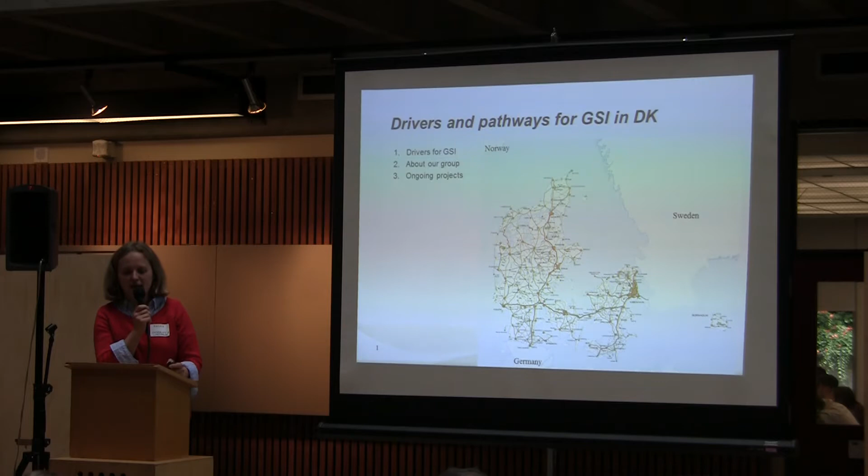So, the main drivers for change in stormwater management in the Danish cities. I think first of all it is climate change adaptation. That is on top of everybody's mind - how to avoid these uncontrolled floodings that we have seen for the last 5, 6, 7 years.

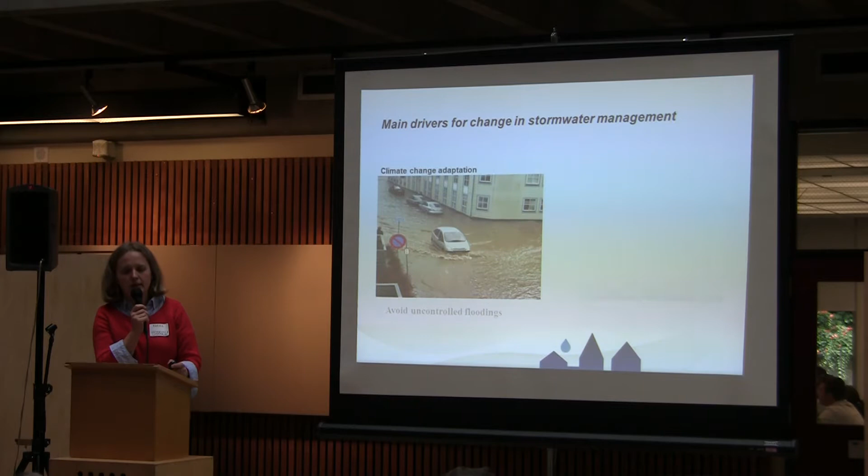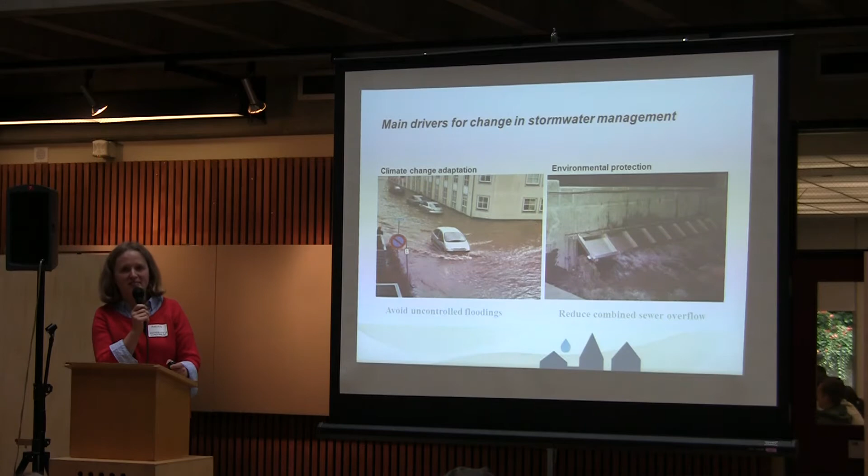Another quite important driver is environmental protection and how to reduce the combined sewer overflows. Some additional drivers...

It's about increasing the livability of the cities - using stormwater as a positive for aesthetical reasons, for social integration, increased biodiversity, mitigating urban heat island. These things are on the agenda to a more or less extended degree across the country.

Our group, I think we're like 33, 34 people joining this tour. We are all part of a strategic partnership that we have named Water in Urban Areas. We are supported by the Danish Council for Technology and Innovation, and we started 2 years ago, and we will finish by the end of 2014.

We have been given a grant of approximately 4.2 million US dollars. And today we are like 150 partners, institutions across the nation. And I guess that the 33 people joining this tour represent like 25 of these partners.

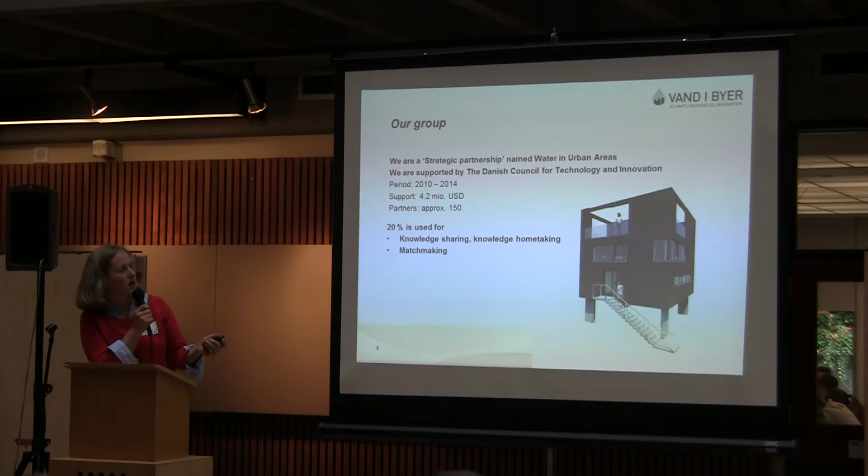So we are trying to create a joint place where we have two main purposes. We use 20% of this grant for knowledge sharing, knowledge home-taking, like this tour. Last year we had a tour around Scandinavia, next year we will go around Europe to take home new knowledge, and then we also use a lot of time on matchmaking and identifying problems and good ideas.

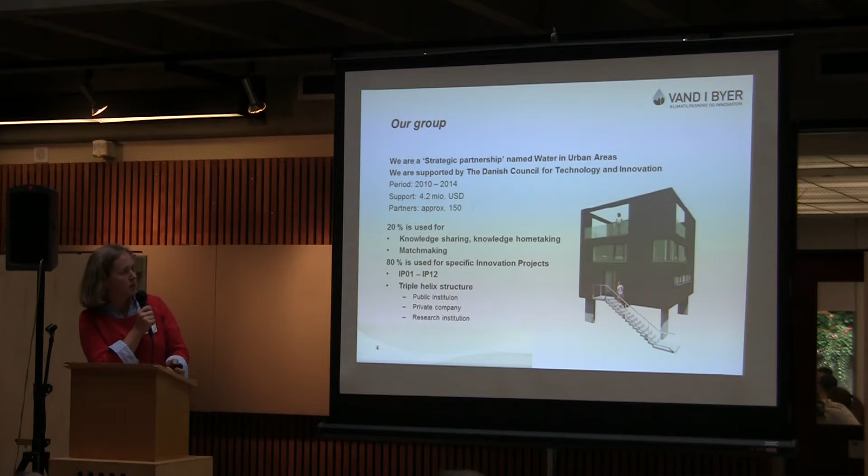The major part of our grant is used for specific innovation projects, and so far we have initiated 12 of these innovation projects, and I will give you an introduction to some of them.

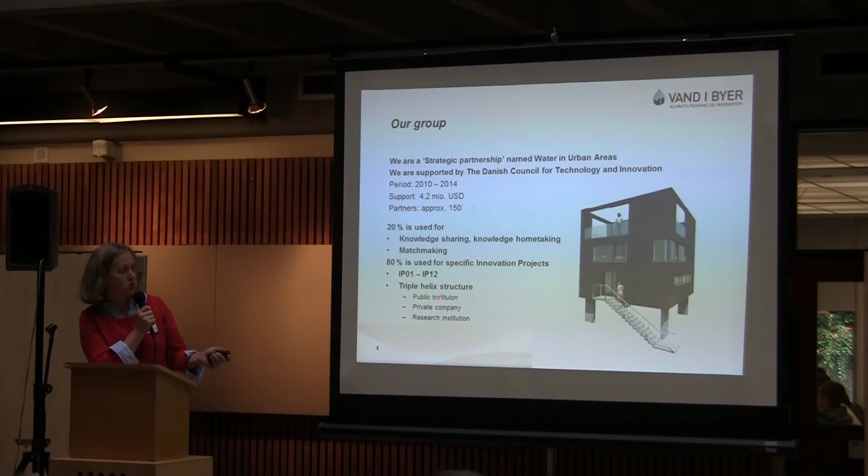The requirement for using money on these innovation projects is that it has a triple helix structure, and it means that in each project we should have at least one public institution representing the end users, one private company, and one research institution, and preferably more.

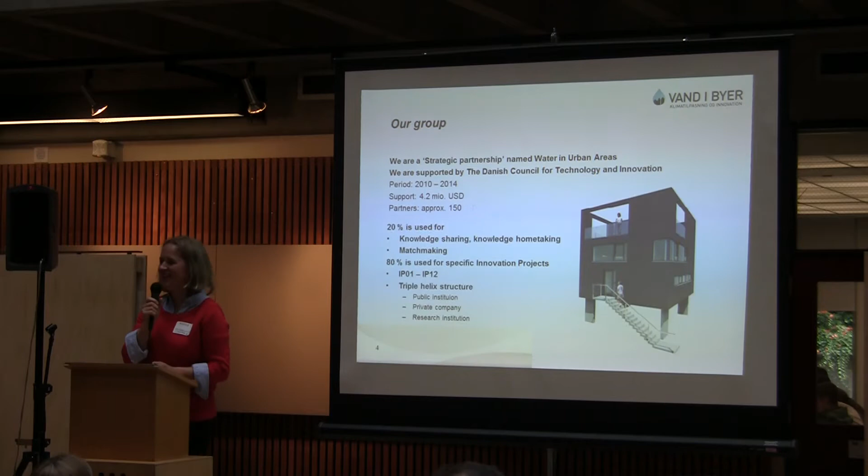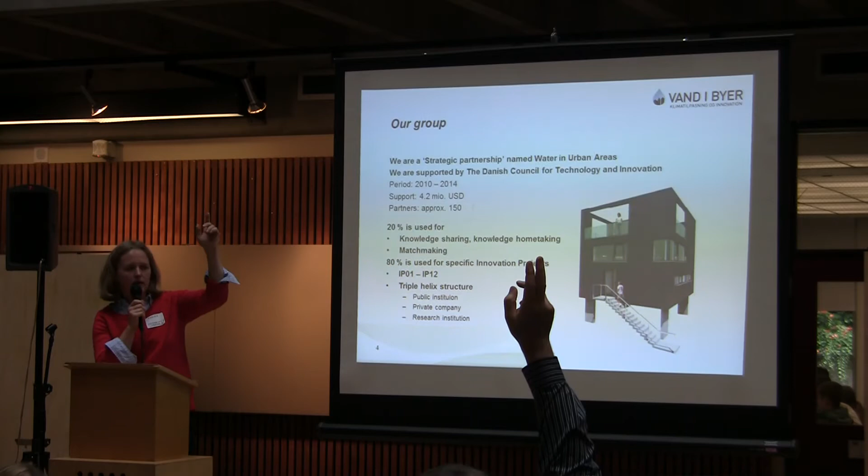So maybe I could ask the Danish participants to raise your hands if you are a public institution, including - yeah, so these are you are a research institution, sorry. And how many do we have from the private companies? And from the research institutions, including DHI, I think? Yes? And I think that is quite representative for our partnership.

What do we aim to achieve? The overall goal is to contribute to the transformation of cities from climate-sensitive units with high greenhouse gas emissions to climate resilient cities with low greenhouse gas emissions and continued growth and welfare. So the idea of Water in Urban Areas is to facilitate such processes. And the idea behind it is that we will come through with a transformation of the Danish cities, and as an extra benefit, maybe we will come up with some good solutions that can be exported and help pay back the investment in the transformation of the cities.

One of the key questions is this one: grey or green solutions? Should we go for larger pipes, sewer-based climate change adaptation, or can we come through with some disconnections, landscape-based adaptations?

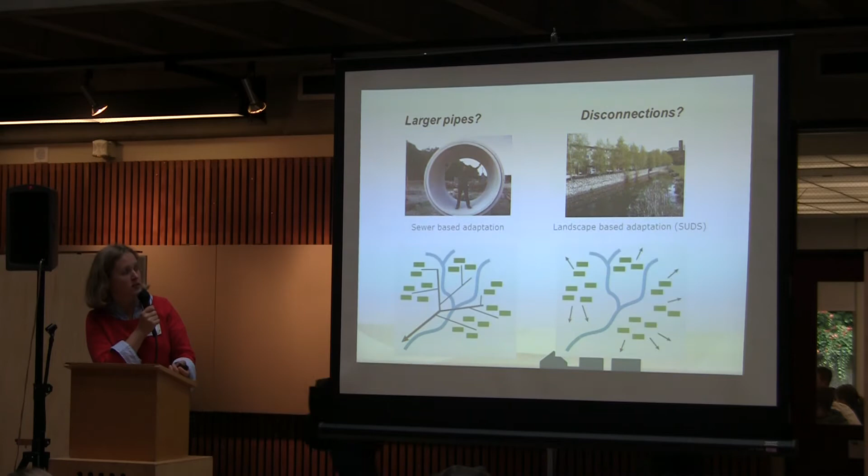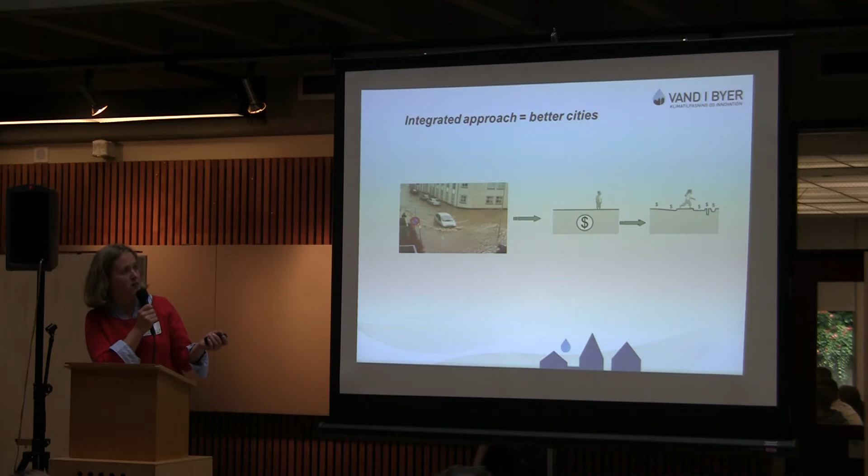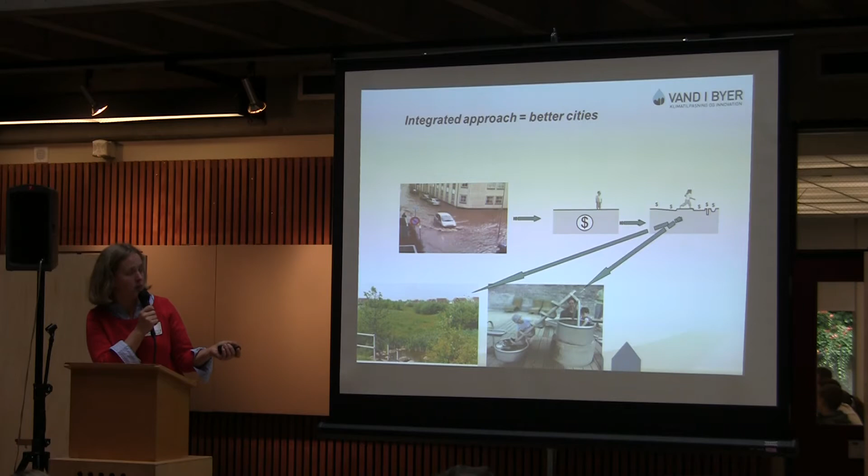I think there's a joint understanding that by having an integrated approach where we lift the investments in climate change adaptation from below ground to above ground, there may be a lot of benefits, such as enhancing biodiversity, creating new meeting places, and supporting mobility in the city. But the key question is really, is this worth the investment, or is it too costly?

We have a three-way approach to sizing this potential. First of all, that's a question of quantity: is it at all possible to find room in the city for all this water?

How about the quality? In Denmark, we rely heavily on groundwater for drinking water supply, so we are not interested in polluting that water if we increase infiltration of perhaps contaminated water. And the last thing is, can we really make this added value come through? Can we increase the life quality? There are a lot of issues and disciplines that have to work together to assess these things, and that is really the background for this partnership.

Now I will go through these innovation projects, which will be a quite rapid flyover of what is going on. I hope we will have time to discuss it further if you have specific questions.

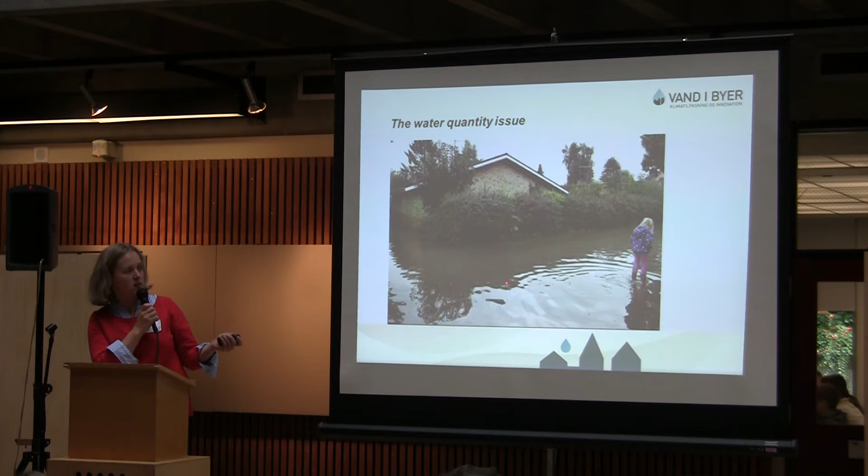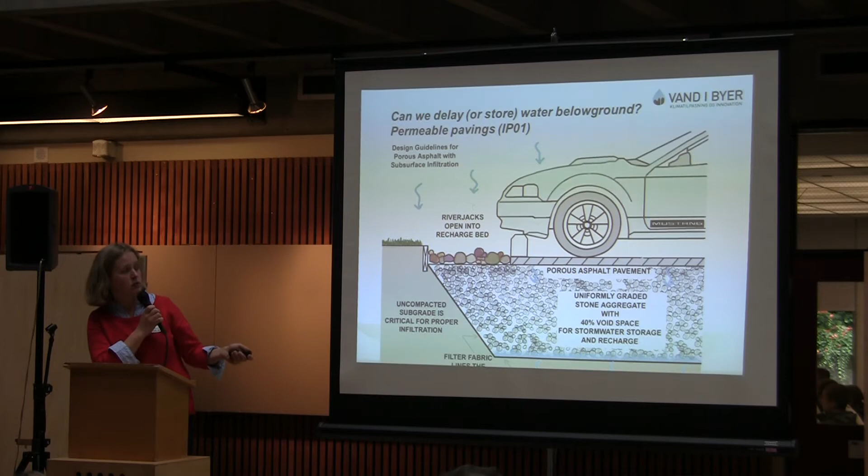Regarding the quantity issue, can we find room in the city? To avoid making bigger pipes, can we use green infrastructure instead? We are looking into permeable pavings that have a huge storage capacity below ground, so we can really create a delay in the city. We are testing a new carrying layer based on gravel.

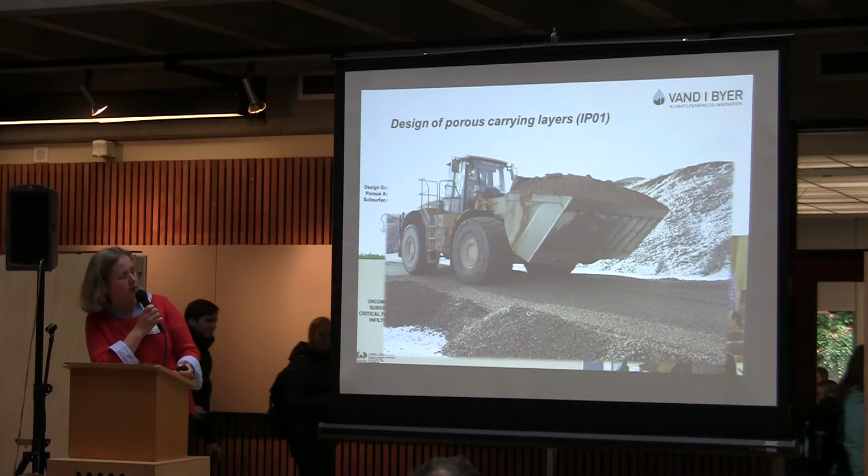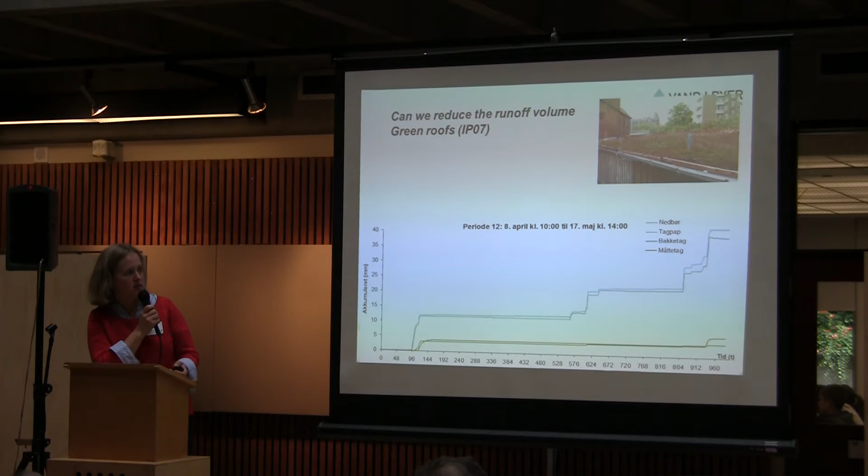In another project, we are looking into the opportunity of increasing the infiltration rate. If we understand the soil better - we have morainic till soils in Denmark with huge variability in morphology - and if we can map that morphology, we may be able to place our infiltration devices more strategically, using the more permeable layers for rapid infiltration.

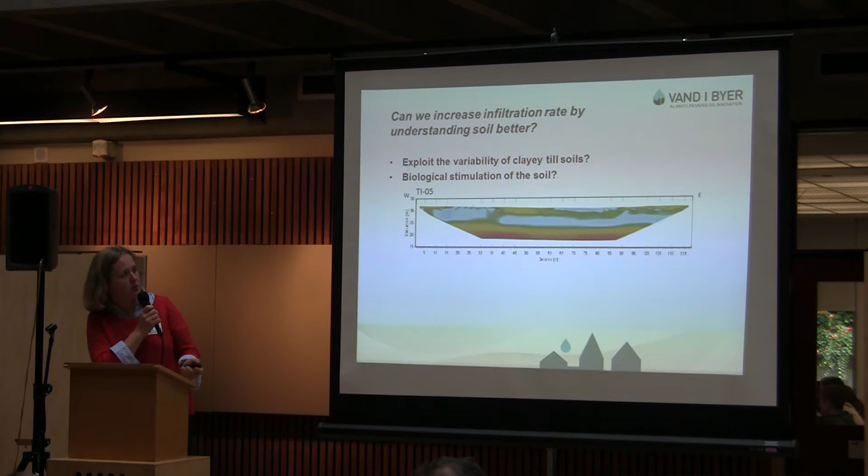We also make experiments with biological stimulation of the soil. Can we increase the earthworm population in urban areas to increase the infiltration rate?

Regarding the water quality issue, we are very concerned about that. We have focused on all these groups of contaminants and are looking into opportunities for cleaning the runoff water before discharging or infiltrating it.

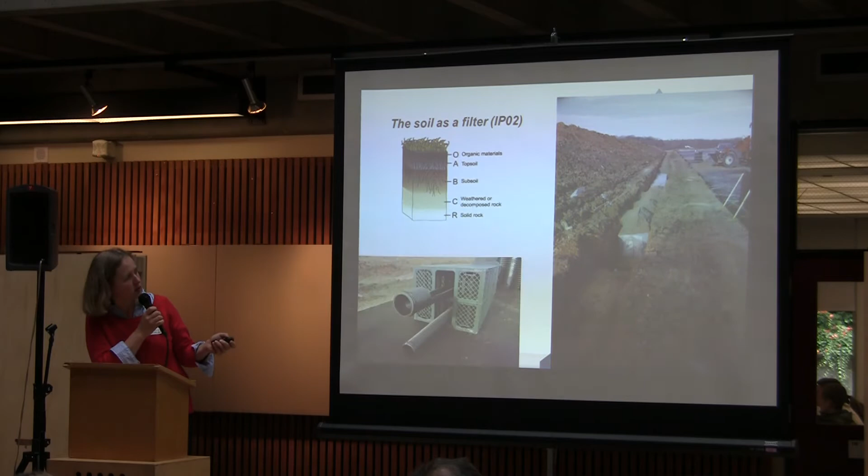We try to document if we can use the soil as a filter, doing engineered soils as we do here. We have a test facility right next to a parking area where we made an infiltration trench, and on top of that we put the filter soil, the engineered soil. We have equipment for taking out samples to see if it meets requirements.

We also test a technology we call dual porosity filtration, specifically developed for treatment of road runoff. We have a pilot plant in Copenhagen, and this is the quality of the road runoff as it enters the facility - it's a horizontal flowing treatment facility, and for every meter it becomes cleaner.

Now we're going to test if some industrially produced panels can do the job in a real setting. We have 3 selected roads in a suburb of Copenhagen where we would like to disconnect these roads, take the road runoff into a park, use an existing ditch for water storage, and then treat the stormwater in a dual porosity facility before discharging to a stream.

Okay, the integrated approach - I have selected these projects. Can we increase biodiversity and improve habitat quality in our cities by linking stormwater management to this?

We have an example in a municipality north of Copenhagen called Allerød, where they're going to build some retention basins. The idea is to link the design of these basins with the municipality's biodiversity strategy, to see if we can create good habitats for some of the species they are targeting.

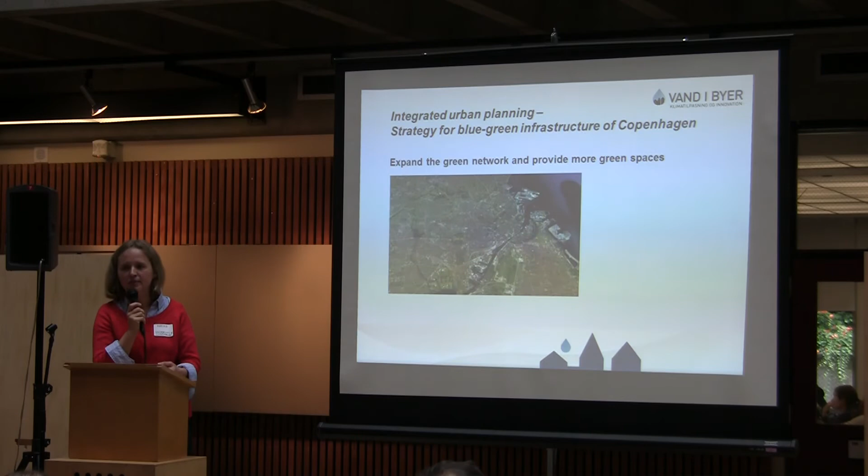quite densely built areas. Okay, and as a final example, I would like to highlight an ongoing project in the city of Copenhagen. They have the idea of making a strategy for their green infrastructure, and actually we have Henriette Bergring with us here, who is the head of that strategy. She is from the Park and Nature Department in the city of Copenhagen, and the strategy will be for blue-green infrastructure in Copenhagen, and the main goal is to expand the green network and provide more green spaces.

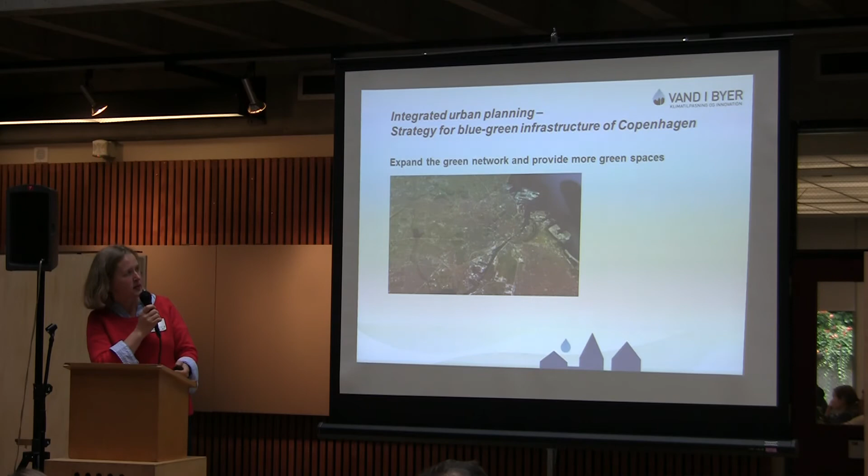Here you see Copenhagen, quite close to the ocean. We have quite a lot of green areas already, and some nice blue areas with some lakes. The idea is then to provide more of this and to make a better connectivity, but on top of that, the idea is to integrate with a lot of added values. So the idea is that the green infrastructure should also manage the stormwater runoff, buffer the urban heat island, which is not a big problem in Copenhagen, but still we have some measurements showing that some areas can become very hot during heat spells. It should make room for more nature and be integrated with the biodiversity strategy,

and it should improve mobility conditions, especially for bicycle riders, and it should preferably also create some new jobs in Copenhagen. And it may end up looking something like this, integrating some of the new biking lanes, these dotted lines here, with some major structures for stormwater management, with the existing green areas, and try to come up with guidelines on how to mitigate the hotspots, the urban heat islands that are identified in the city. Yes.

So I think in Denmark we have an advantage of having a very broad, how do you say? There's a lot of actors from all sides of the Danish society and from a lot of disciplines that are working together on this, and it's not only in the capital city or in the major cities, it is very widely spread out. And I think this partnership is a good chance of sharing knowledge. So I think there's a great potential in Denmark for coming up with some good results on this.

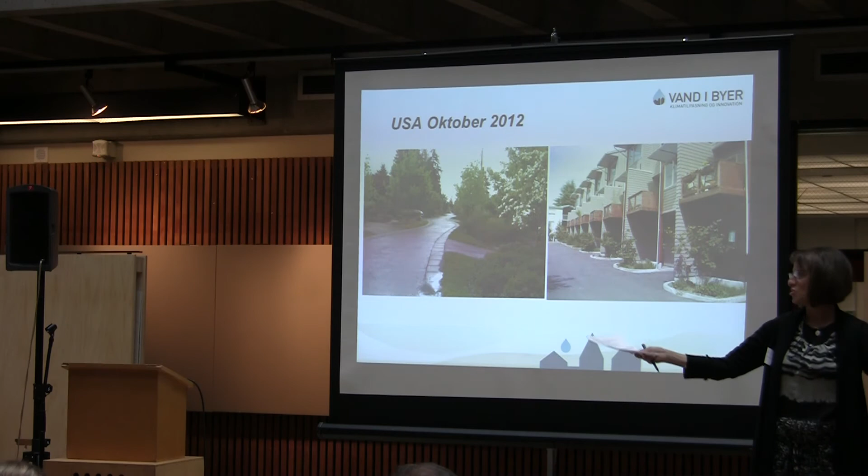Any questions? Anybody have questions? Well, this is actually a segment where we said there could be questions for any of the speakers. So maybe you thought of something after Brian or Annika, and you'd like to present that. Just see what kind of questions you might have, and then whoever's going to answer.